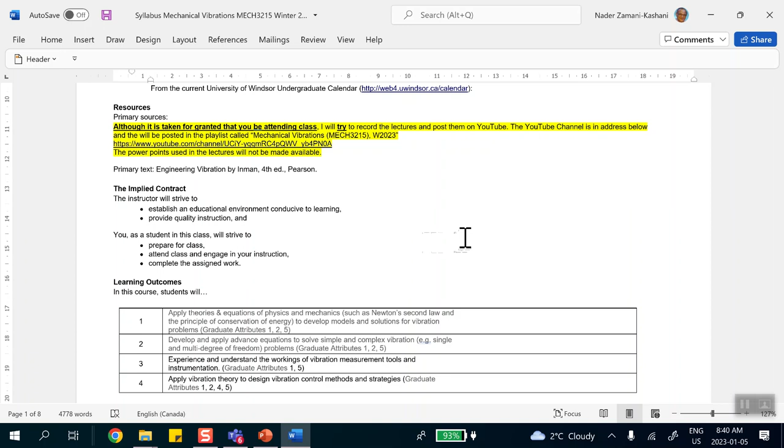Okay? Or if you say, that's okay, I'll borrow some other friends' screen capture documents. That happened last summer. I saw people had screen captured or taken notes and copied it, multiple copies, given it to friends. Okay, I saw that, and I have no issue with it. It's just that if you read somebody else's stuff, particularly the day of the test, it's not going to help you. But anyway, this was not in the course syllabus. The reason I wanted to put it there is that I don't want people to say, this is mean. Why can we bring everything, but you're not giving us the PowerPoint? I told you: make your own PowerPoint if you want. Bring it. Okay, everything else is the same as what's already there.

Just about every 3 weeks during the lab, 50 minutes, and if there's no class after that, I'll give you an extra 10 minutes, okay? And even if there's a class after that, I'll try to convince the instructor to give me 10 minutes, we're running a test, okay? 1 hour on the material, done. Okay, now remember, in certain courses, material depends on the material done earlier. Some courses may not be like that.

If you take a course, I don't know, technical communication, or maybe you haven't taken engineering in society yet, but you will, all of you who are in 4th year. You go to 3 weeks of classes, they say something, that's it. Learn it, come back and write a test on it, okay? But engineering and math doesn't work like that. You might pretend that it works like that. We might think that we are so good that we can treat it like that, but it's not. Anyway, we'll come back to that.

So these are the dates during the lab hour, and this is the list of the GAs that we have now. This person, you don't have it. I got the information last night and I fixed it.

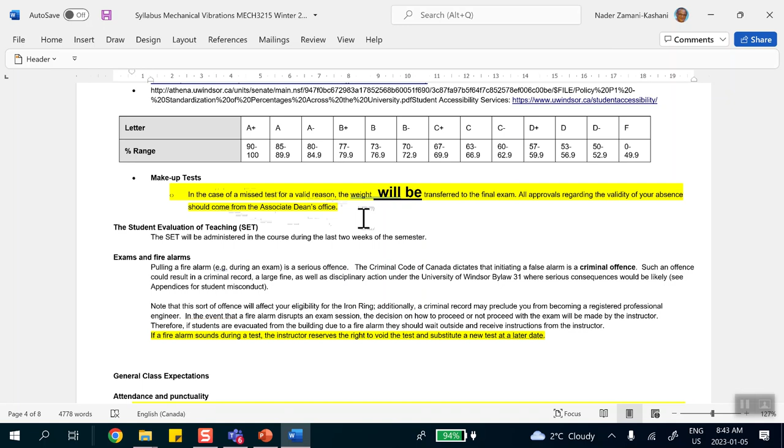If you miss a test for a valid reason, and I'm not going to judge you, don't come to me, please, saying that I was sick or I was traveling. These are perfectly legitimate things. But go to the Associate Dean's office, discuss your case with the Associate Dean. If she agrees with your explanation, she will tell me that this is a legitimate reason, so I'm going to take the weight of that test and put it on the final exam. Okay? I think that's what it says. Yeah, I'm pretty sure, down there. So, final exam. Good. We don't want to hear about fire alarm, but this usually applies. Yeah.

Okay. Already talked about this. This course does have supplemental privileges. The reason I say that, some courses do not have supplemental privileges. For example, if you did fail the technical communications course, you have to take it. There's no way to go and say, I want to write a makeup test on that subject. But this one does. Most courses do, but the ones that involve design and communications and essays and things like that, they don't have it. You have to take the course again. But this one does.

Generally speaking, supplementals are done in December of that year. Now, most of you are fourth-year students, okay? So you will be graduating. You can't come December of next year because in principle you're going to be done in August. And I understand that. If there are situations like this, we will give you an early special supplemental exam. The associate dean will tell me that this is the situation. No problem. Otherwise, it's whenever every other supplemental is, which is in December of that year.

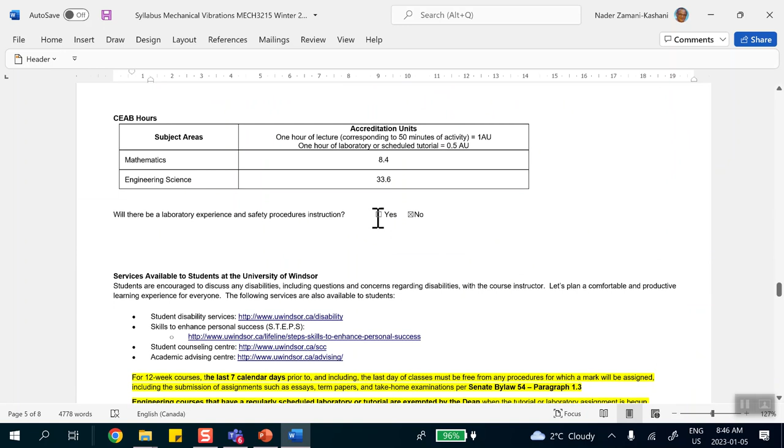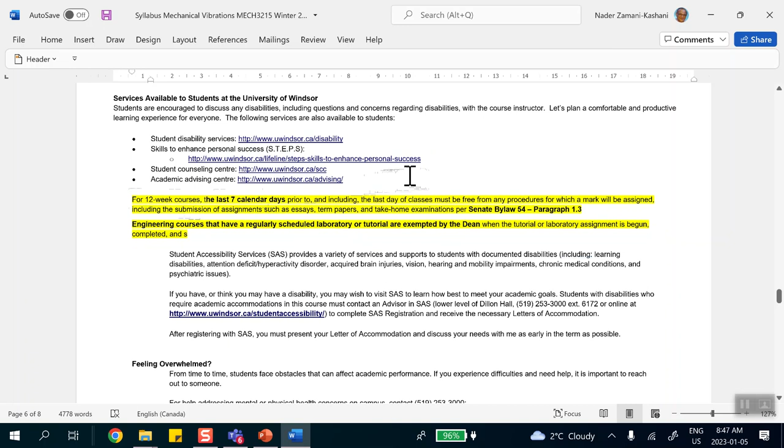Important, but usually people don't care about it. If you have any questions, let me know. I will not have anything that gives you a mark in the last 7 days of classes, so you don't have to worry about that. Certain courses this doesn't apply to. And yeah, that's pretty much it. So it's very similar to what you already have, but with some minor changes. Don't save. Okay. Are there any questions? Questions? We're good. All right. So let me see for a second.

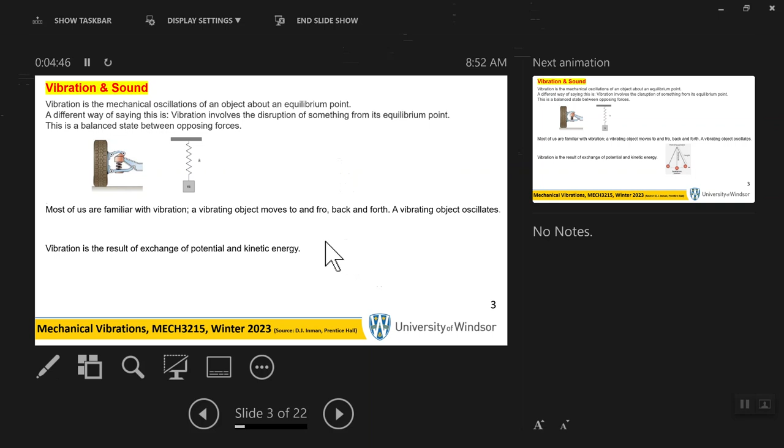Now, an ordinary person will say vibration means moving back and forth, to and fro. Something that moves about an equilibrium point. Vibration is an oscillation. The reason that vibration takes place is that kinetic energy and potential energy are exchanged. Imagine a pendulum hanging from the top. You move the pendulum slightly to the right and let it go.

So what happens when it reaches the top point? That's where the kinetic energy is zero. It is not going anywhere. Velocity is zero. Kinetic energy is zero, but it has the biggest potential energy because you raise the mass above some reference point. Now imagine it comes back to the vertical position. There, the velocity is maximum, but there's no potential energy.

If you measure your potential energy from that bottom point, the bottom equilibrium point, there's no potential energy. So as this thing takes place, kinetic energy and potential energy are exchanged. Okay? That's what a vibration is: exchange between potential and kinetic energy. Now, we are assuming that there is no loss in energy, because you know what happens here.

If in a pendulum, for example, you let this thing vibrate, oscillate for a long time, eventually it stops. Why does it stop? Because at some point, the energy is completely lost. Okay? So we will do that, but in the ideal situation, this vibration takes forever without any loss in energy. Where do you think this loss of energy is coming from? Why does this thing slow down after a long time? What does your common sense tell you? Why does it stop? Yes.

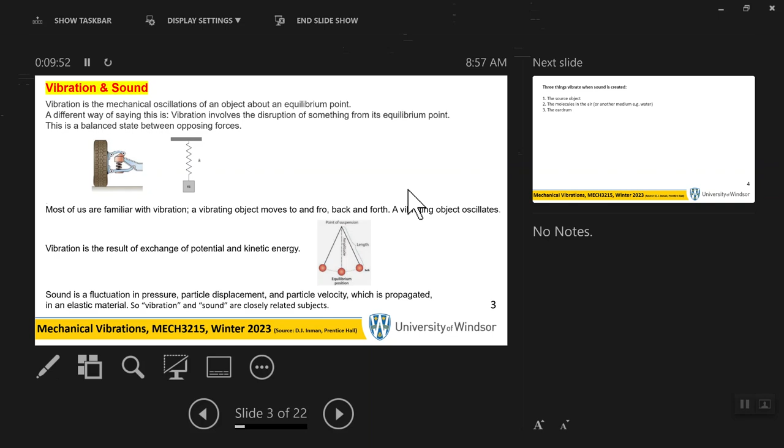So sound is vibration, but vibration of the molecules of the air, not traveling. They just hit the next guy, that guy hits the next guy, and each goes back to its original position. In that sense, sound has the same source. Sound happens because of three things: vibration at the source object, the speaker diaphragm; the molecules of the air; and at the end, the eardrum.

And by the way, this concept is not only sound; it also applies to, for example, electromagnetic waves and things like that. There is no air there that moves, but the same concept applies. Okay. So air itself does not travel.

Now we are concerned about sound because it bothers us. A buzzing sound, a high frequency or low pitch sound, bothers us. The vibration frequency of sound that we can hear as human beings is in this range: 20 hertz to 20 kilohertz. Dogs or other animals can probably hear outside that range, but human beings are sensitive to audible sound in that frequency range.

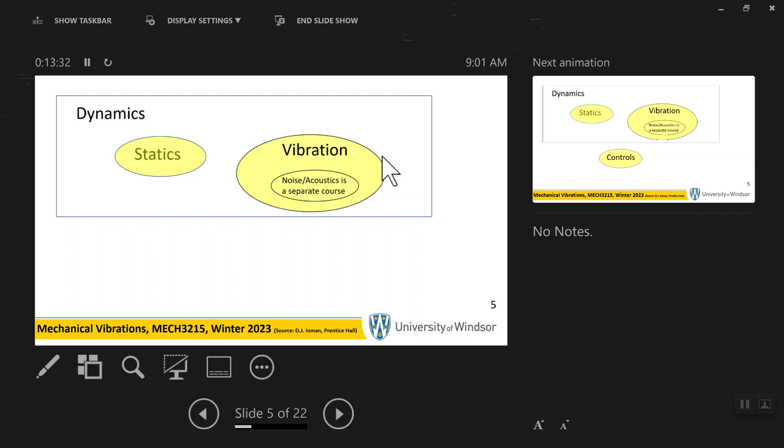Now, vibration is part of dynamics. Loosely speaking, things must move, oscillate, vibrate, whatever. So vibration is part of dynamics, and acoustics or noise is a subset of vibration. This course is about vibration. But if you learned everything about vibration and you don't know what to do about it, that's useless. So you need to control the vibration. That is not part of this course. But in order to do anything meaningful, you have to control.

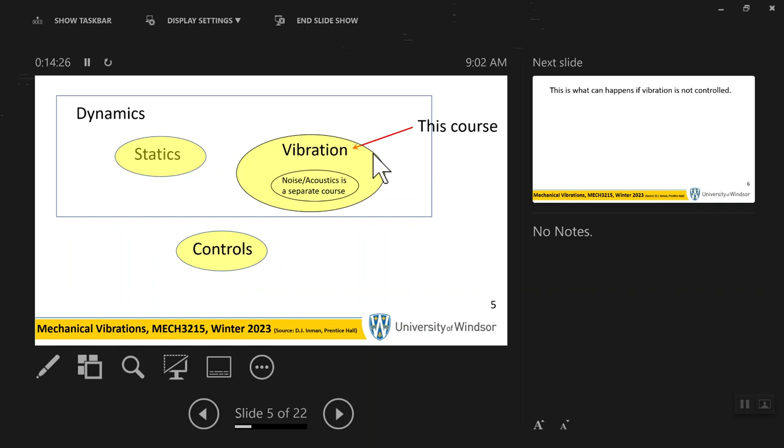That is, you have all taken the control theory course, right? Third year. Oh, is it fourth year? It used to be third year because there were two controls courses. Now there's one. Apparently everybody takes it. You will see that they talk about the same kind of equations that we're going to see here, and they do things with it. But that's not my problem.

Now, what can happen if vibration is not controlled? I'll show you a video. Do you recognize this? Ambassador Bridge? Really? Where is this? Okay, so we'll find out.

I have to admit that when I did my undergraduate education, I did it in pure mathematics. And I stayed away from anything that had to do with reality. Not even an economics course. The very first time I ever saw something like this was after I went to graduate school in an applied math department. I was the GA for a differential equations course. No vibration in sight, no force equals mass times acceleration in sight.

But anyway, differential equations. The guy who taught the course showed this on the screen because it's closely related to the subject. You see something like that getting bigger and bigger, and eventually you see what happens to it. What do you call this? You go to an interview, less than a year from now. The guy asks you, "What do you know about this? Why did it happen?" Imagine a twist like that. What would your answer be?

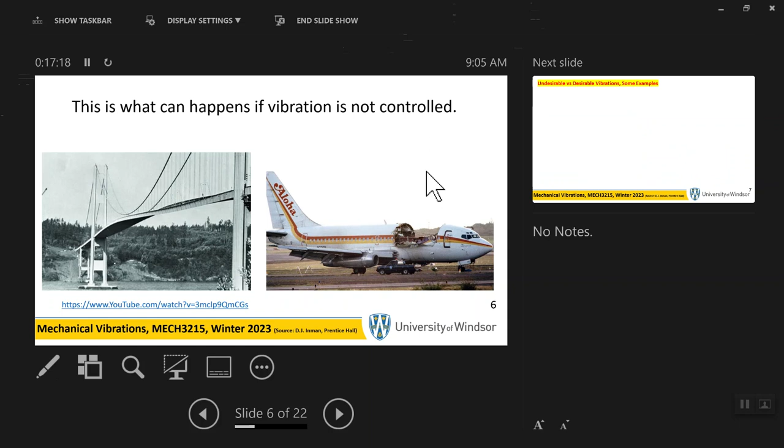So, I want to show you this. Let me stop that. We'll go here. Hopefully this will work. Come on. Oh, let me copy this. At home, when I clicked on it, it would take you there. We'll see. Paste. I don't know whether the sound comes, but we'll find out. Come on.

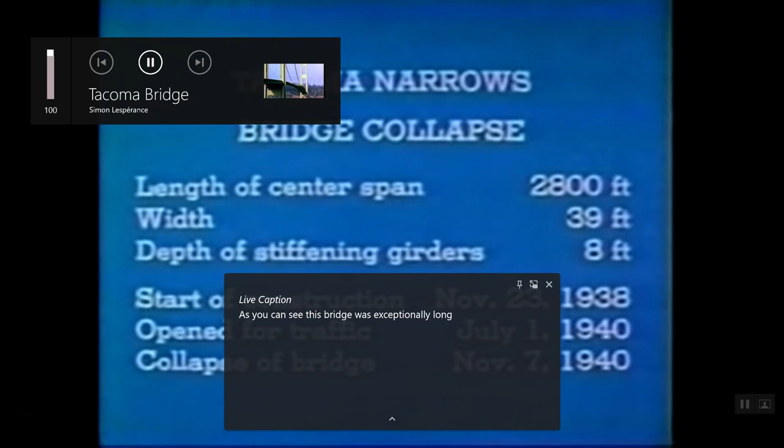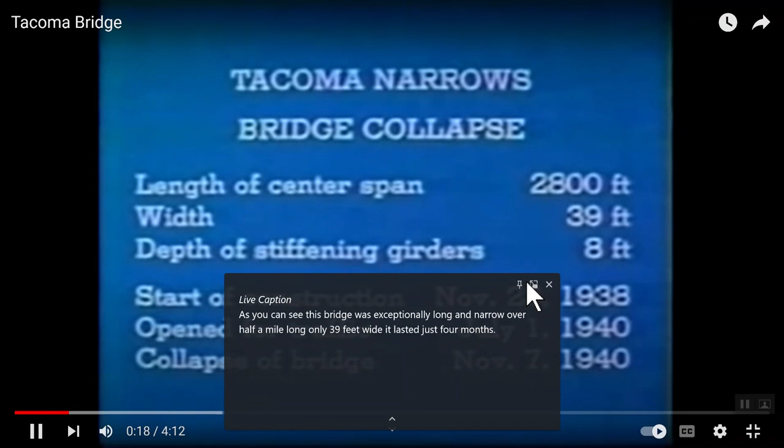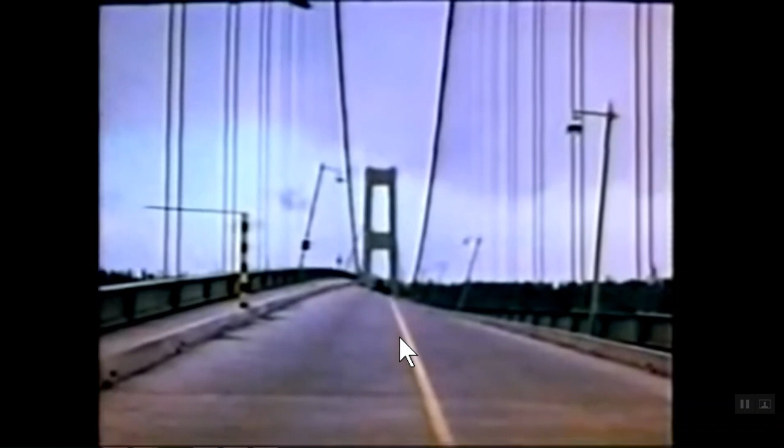As you can see, this bridge was exceptionally long and narrow, over half a mile long, only 39 feet wide. It lasted just 4 months. During construction, we see the steel girders, 8 feet tall, which were supposed to stiffen the bridge against bending. However, some up and down vibration was observed during the entire useful life of the bridge. Here's opening day. On November 7th, the bridge suddenly went into a twisting motion. The wind speed was a steady 42 miles per hour. This was enough to keep the bridge oscillating in one of its natural modes of vibration with a period of 5 seconds.

A professor of engineering went out to see what had happened. He's coming back, walking with some difficulty along the nodal line, which is the center stripe of the roadway. It's remarkable that the girders were this flexible. This is photographed at normal speed. However, a collapse was inevitable after a little more than an hour of this.

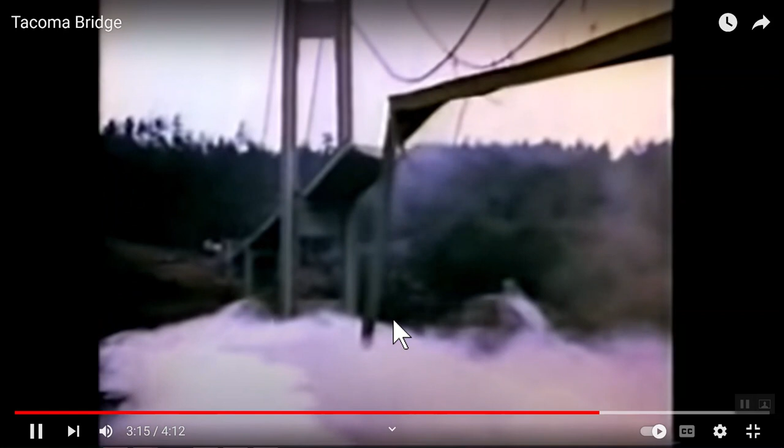Now, by the way, after that thing, there was a press interview with the governor. This was Tacoma Narrows Bridge, the name of it, Tacoma Narrows Bridge in Washington State. And the governor very assuredly told the reporters and the members of the press, don't worry about it. We're going to make this bridge exactly at the exact same location, exactly the way we made the first one,

and it's going to be ready soon. And somebody said, well, it's going to fail exactly the same way that the first one did, which is true. There are design flaws. You do it again, it may not happen next year, it may not take 4 months, but it may take 10 years. Eventually, those design flaws are going to pop up in some other way. Okay, so let's move on.

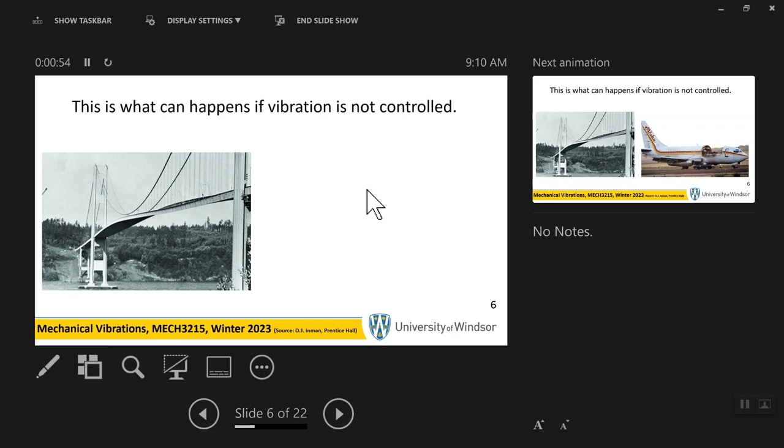This one. So now, vibration is not always bad. I mean, you use these shakers to separate, for example, small blueberries from big blueberries, or small nuts from the big nuts. Or another one is a rock crushing mechanism. We did a version of it in the class last. It was a 4-bar linkage again. It went back and forth and crushed the stones. So vibration is not always bad, but it can also be catastrophic.

And the one that you saw with the airplane, not the one with the bridge, was eventually traced down to fatigue crack growth. As the plane takes off and lands, the pressure inside the cabin must be controlled. So they raise the pressure, they lower the pressure to make it atmospheric, raise, lower. So there is something that is changing over time.

And if it is a tiny little crack, you have done materials course, under this very small change in load, pressure raising, pressure lowering, this cyclic load, that tiny little crack becomes bigger and bigger. It jumps from one rivet to another rivet, and then to the next one, and the whole thing can fall apart. Basically, there's one gigantic crack going around the top between rivets.

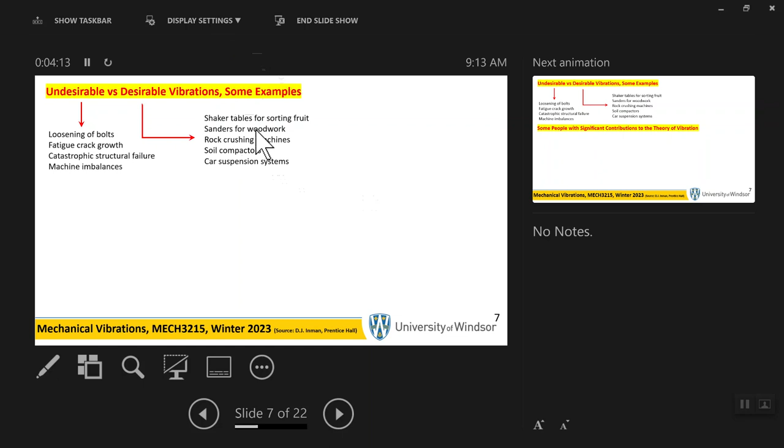that is noticeable. You should be able to say how much force is transmitted to the ground. You don't want the whole force to be transmitted, because it's going to come to you through the ground. You're going to feel it. So you want only a portion of it to be transferred. Machine imbalance is very critical, and one of the things we do in this course. Now, I want to show you some pictures.

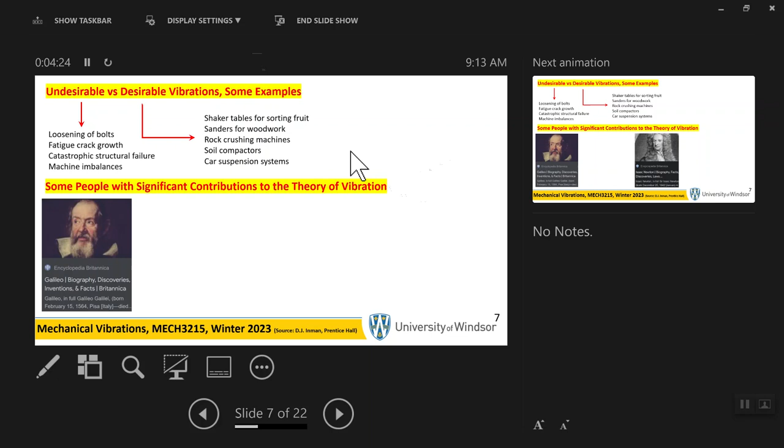Galileo was the very first person who actually worried about these things. I'll give you some names. It's good to know who did these things. Newton, obviously, because vibration is dynamics. Dynamics is F equal to ma. Hooke. Where does Hooke come into the picture? You know who Hooke was, right? Can you tell me how Hooke comes into this business? Yes?

Yes, of the spring. When you try to do vibrations analytically, and experimentally too, you need a mass and you need a spring. We leave the damper aside. Damper is what takes energy away, like friction. Let's say we're living in an ideal world. Spring and a mass. Hooke did not per se do vibration, but his contribution is in defining stiffness.

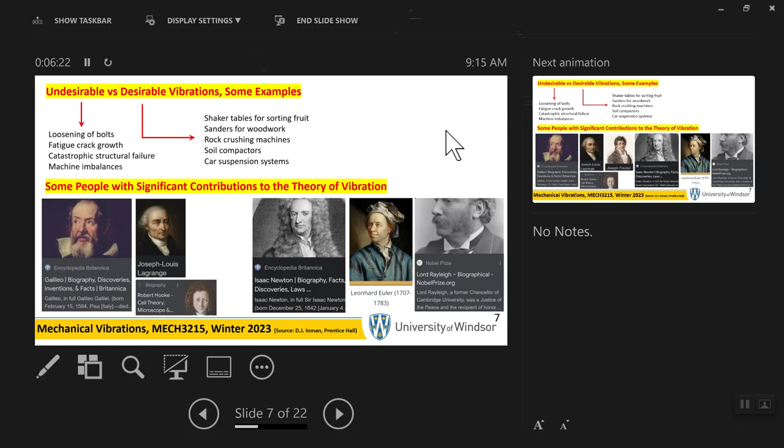So one of the things that you can't escape here is the concept of frequency. For example, you take a spring and attach a mass to it, either this way or that way, or put it horizontally, it doesn't matter. You take the mass, move it to another position, and let it go. You know what's going to happen. Or this, whether it's on the top or the bottom.

So frequency is the number of these oscillations in 1 second. The unit is cycles per second, number of oscillations per second, and they denote it by hertz. This is fine, but most of the stuff that we're going to be doing when it comes to frequency, when it comes to doing some hand calculation, is not in this unit. It's in a different unit, which is not cycles per second, but radians per second, because each cycle is 360 degrees, right?

But degrees is a layman's, ordinary person's unit of angle. The unit of angle is radians. So one cycle is 2 pi. 2 pi radians per second is the frequency in that unit. So let me say it again. In 1 second, how many cycles? Each cycle is 2 pi. So if you take hertz and multiply it by 2 pi, you get the circular frequency, which is radians per second. Any radian per second divided by 2 pi, you get hertz. So these are related.

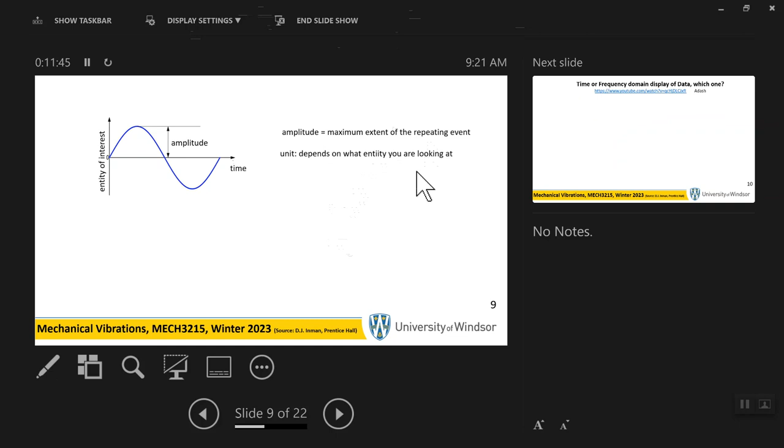So, move on. When you take one of these cycles, it looks like a sine, but it doesn't have to be sine, I'm just drawing it as a sine. There is an amplitude, and when it comes to amplitude, plus or minus doesn't matter for us. So there's the amplitude, the maximum extent of repeating events. And let me show you something.

So you have this machine, this fan that is going up and down on this table, and you want to find, for example, the displacement of the table. The fan goes up and down. The reason is that the fan is not a disc. If it was a perfectly round manufactured disc, as it turns, there wouldn't be any oscillation.

None whatsoever. But it's not a disc, number one. And even if it was a disc, it would not be perfect. There's a tiny little chip there, or a little hole there, or just by manufacturing reasons, some part of it was a little bit heavier than the other one. Or the place where you actually stuck that disc into the center of rotation may not be exactly the center of mass of the thing.

So anyway, I'm saying that even if it was a disc, the table will go up and down. Definitely for a fan, it will go up and down because there's an imbalance. Okay? Now, you want to know, for example, what the displacement of the tabletop is. Okay, so these days they go and get an accelerometer, stick it to the table, and they measure the acceleration, not the displacement. You can measure displacement, but an accelerometer measures acceleration.

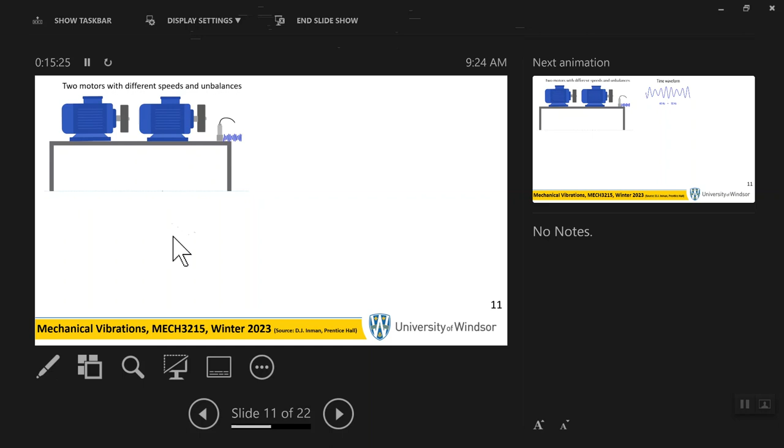So suppose we have two motors sitting there, my fans, and they're turning. And I put that accelerometer on the corner of this table and measure the acceleration. And if you look at the time variation of what you're recording, don't let it fool you. This is not real. Real stuff is going to be jagged. Totally useless if you just try to do that. That is made in that particular case.

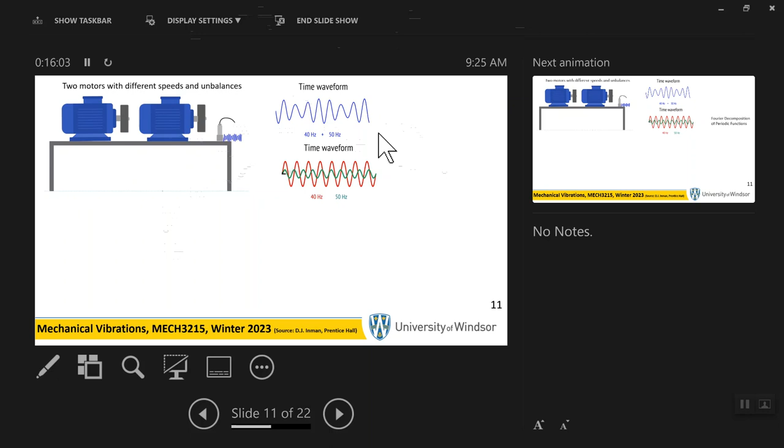If you can use your device to show that the frequency content is actually made of two frequencies, and I've drawn it. If you add these two functions, 40 hertz and 50 hertz, you get the thing on the top. Okay? So, same diagram. It's the same graph, except notice the way I'm displaying it is a little bit different. The amplitude is up. The horizontal axis is time. It's exactly the same graph, blue graph, or decomposed one below it. It's exactly the same thing. I haven't done anything.

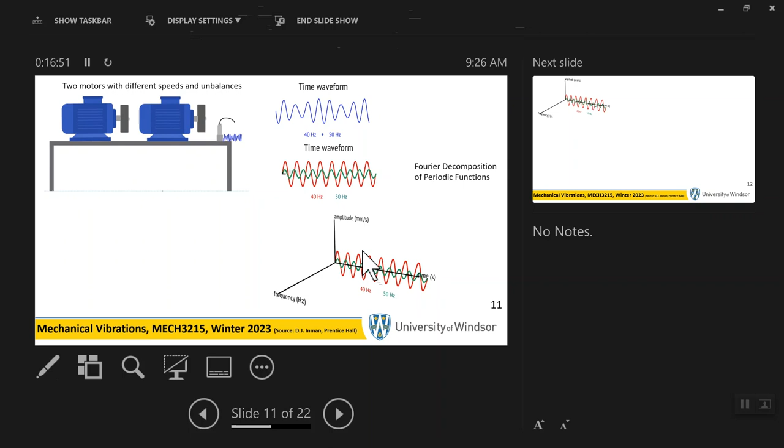But there's an additional frequency axis that I've introduced here. This graph is exactly that graph. I haven't done anything to it yet. Now I'm going to say, okay, when I look at the red one, I know that it's 40 hertz. Just literally go count 40. And the other one is 50 hertz. So I shifted it to 40 and 50. You see that? Now, instead of being in the plane in the back, it's at 40 and 50 hertz.

Just look at the red one. The red one is on the frequency axis at 40 hertz. The green one is at 50 hertz. All I've done is separate these two graphs from each other. Before, when you were looking at it, they were both sitting on the same axis. Now I have separated one on the 50 hertz axis, the other one on the 40 hertz axis. Okay, so exactly the same thing, except I've turned things around. I'm looking at it differently.

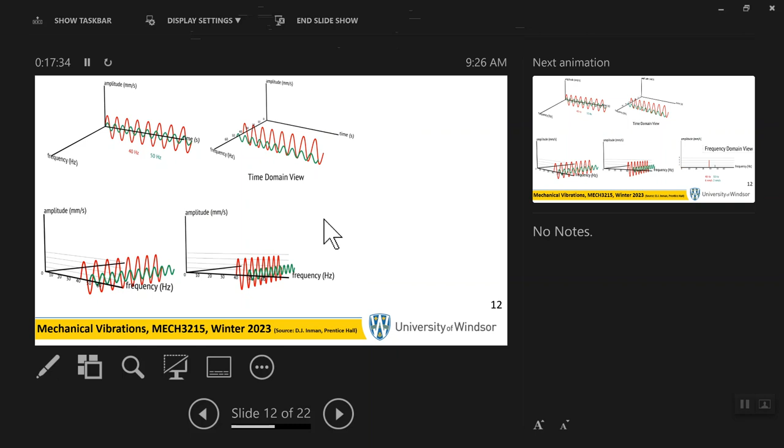Exactly the same thing. And let me turn it a little bit more. And a little bit more. This is what you're going to see. If you looked at the top graph down the time axis, you will see two curves. On the side, what do you see? Just a spike. Because the curve is coming towards you. You can't see it. This red curve is coming towards you.

When I look at it from here, all I see is the amplitude at 40 hertz. And the green one, that green one is coming towards you. And if I look at it from here, all you see is a green spike at 50 hertz. That says it all. Anything that you want to know about your machine can be deduced from this information. You don't have to see sines like that, because all that's important is how often this thing repeats and what the amplitude is. That's what I mean by looking at frequency information.

When you buy an accelerometer and you attach it to something that records the data and shows it to you, you have a choice, seeing it in the time variation or frequency. If you look at the frequency with the frequency option on the display, you just see this. If you look at the time, you see that original blue curve that is not even here. I just basically showed it to you as a green one and a red one, summed up.

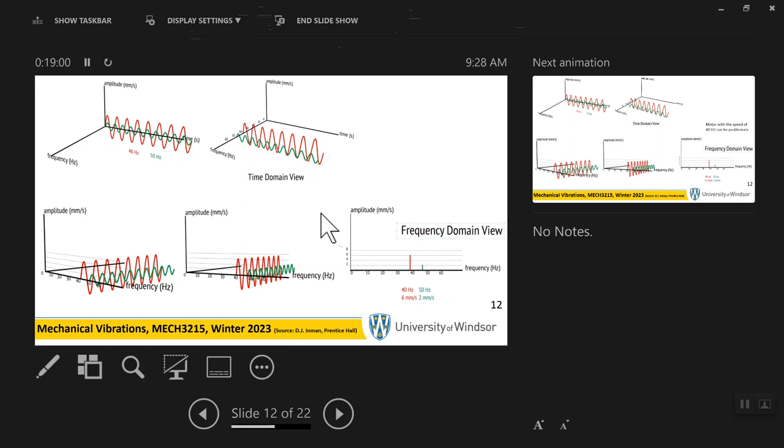Now, we still have it on time, so that's good. So, what do we do here?

I'm sure you've seen it sitting at the window of the airplane and see this wing going like that. See, that's scary. First of all, it doesn't mean it's going to fall apart, because they took these things into consideration when they designed it. If they don't, you end up with a Tacoma Narrows Bridge or that other situation. Wait a minute. Okay, so vibration. You're looking outside the window, you're seeing the wing vibrating.

That scares you. Maybe the rudder, what's that thing? Is it rudder at the end? I can't remember the one that goes like this. Any aerospace students? In a boat it is a rudder, but maybe that thing that makes the yaw motion. Anyway, the thing is that you're not even seeing that. That doesn't bother you. All you're seeing is the wing. Okay, so we concentrate on the wing. The thing in the back may be even more dangerous, but you're looking at this.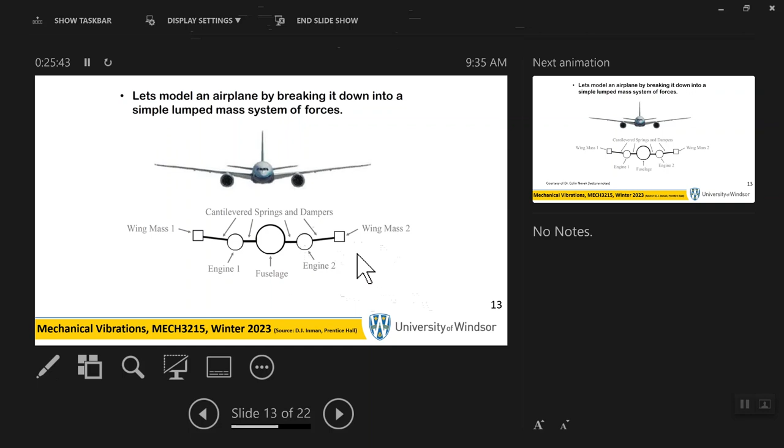All right. Here, essentially, I have thrown these pieces away. I've done a mass here and a beam. It is possible to do other things. Now, I already talked about these things, and the full model is going to be just about impossible to do manually. You can do it on computer, and they do it on a regular basis on computer, with CATIA, which is a terrible FEA solver. Boeing and Airbus, the first attack on the design is using these basic packages.

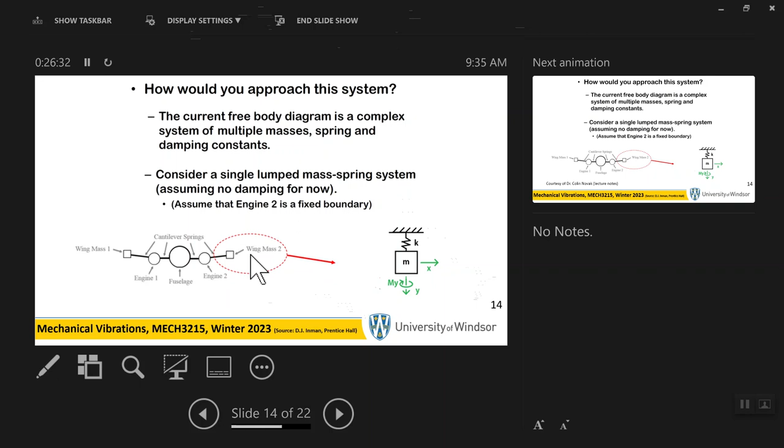Okay, so basically this particular thing that I'm showing you, it looks like I just did the end piece, another cantilever beam. This piece is the beam. That was a beam. The one that I described to you with the two-engine aircraft was this piece. But you could have done it for that because that's also a cantilever. Right there. Cantilever, beam, mass. So basically, we modeled it as a spring and a mass.

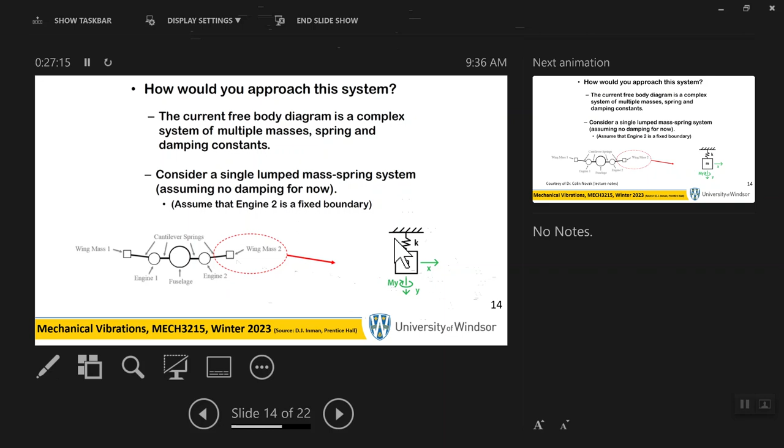This mass can have motion up and down. That's what scares me. It can rotate, spin like that. That's going to give you the yaw motion of the entire wing, and the wing can actually go that way. That doesn't bother me. I can't even see it. It oscillates like this too. But anyway, these are things that we do.

Some of these are taken from Dr. Novak's course that he has offered over the last few years. You take a car. Well, the car has 4 wheels, right? And if you took, for example, the front two and lumped them together, squished them together, there's a tire here, a shock absorber, etc. If you squish it together in the front or in the back, you get what is called a single degree of freedom model of the car. So all you're caring about is vibration like that. You're sitting in the car, the car goes on a bump, and it goes like this. That's all you're caring about.

If you lump the front ones together, you see one of these. The rear ones lumped together, you see another one of those, and put together, you see this. This is a half car model. That's called a quarter car model. In the half car model, you can also do bounce and pitch. As you go over a bump, the frame of the car can not only go up and down, but it also can pitch. You cannot do it with that, because that's a point mass, essentially.

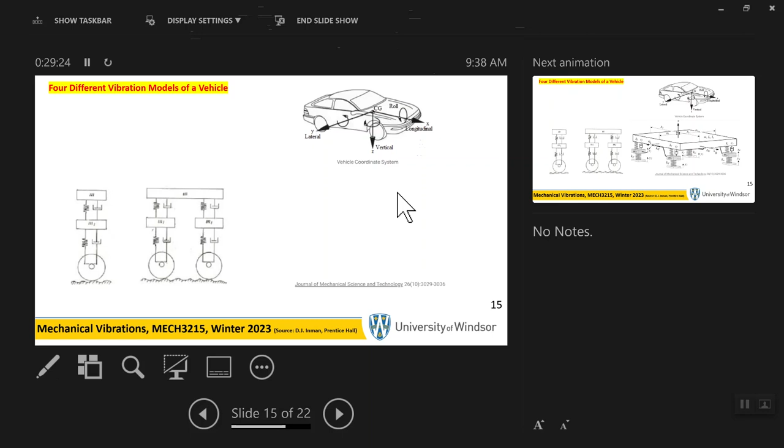So you get the information. The more assumptions you make, the less reliable your information is. But the first round of design is all these very crude models. You don't even know what you want to do. So you don't go and make the whole thing in software and then decide that this shouldn't be like that, let's go change it. Anyways, more realistic is the full car model. You can do bounce and pitch, up and down, and the roll motion, which may not be doable with other things.

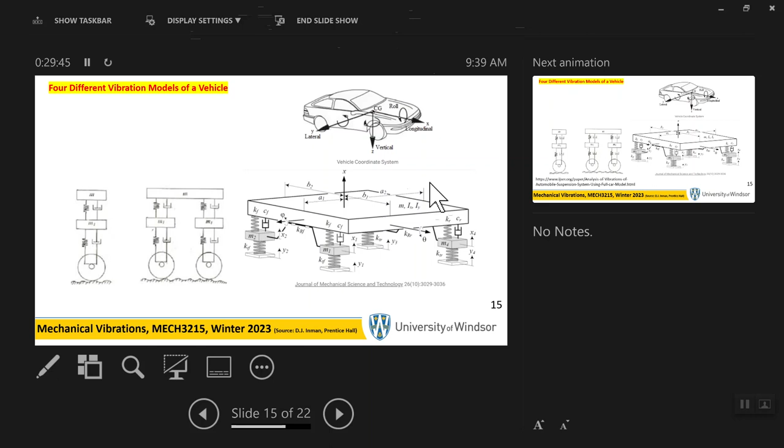So I think I showed you these. One of the things that's going to be extremely important in this course is the number of degrees of freedom associated with a model. For example, the very first one that I showed you, we still have about 5 minutes and I can finish that. The first one that I showed you was a 1 degree of freedom motion of the car, up and down. The next one that I showed you was a 2 degree of freedom motion.

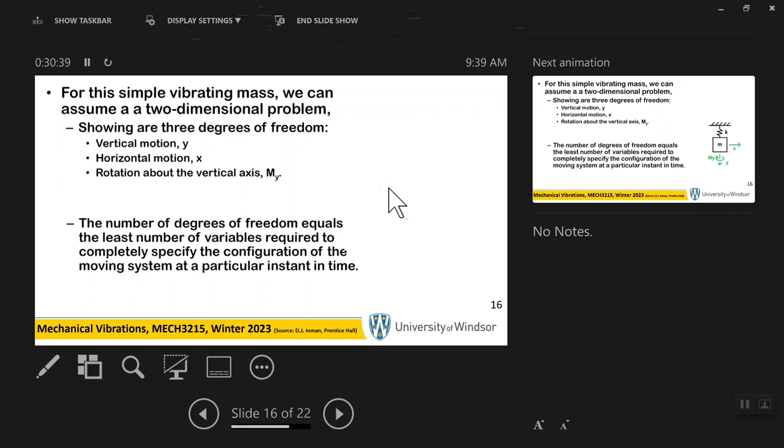For example, you can think about motion of the front wheel, motion of the rear wheel, or you can look at the frame of the car, up and down motion, and the pitch motion. It's the same thing, 2 degree of freedom. The other one was a 4 degree of freedom system. Okay.

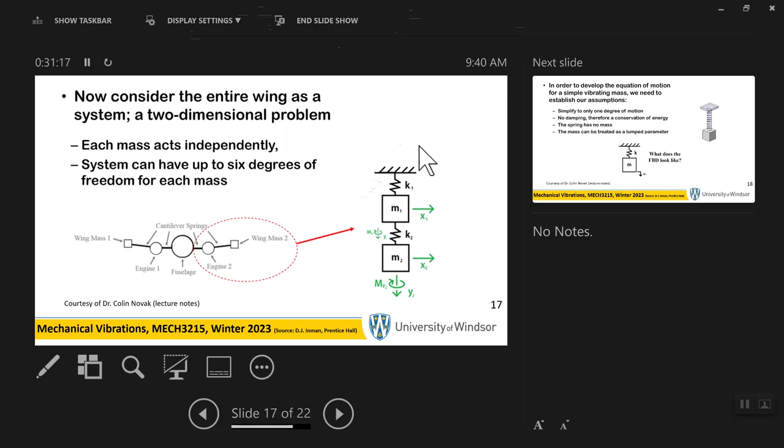In reality, if you have a situation like that for the wing of the aircraft, if there are 2 engines, 2 on this side, 2 on that side, there's no way you can do it with 1 degree of freedom. That wing on one side, engine 1, engine 2. This is a 2 degree of freedom system. We're going to do that in the last 4 weeks of the course. Okay? 2 masses, 2 springs. The number of masses and number of springs has nothing to do with it. What is important is how many degrees of freedom does this have?

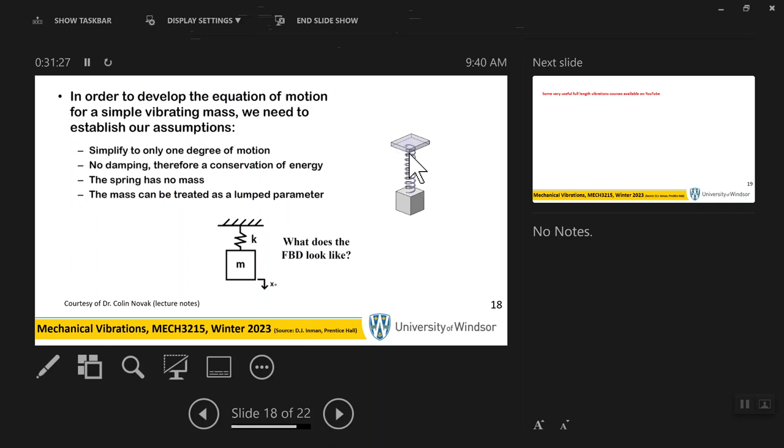Okay, let me see for the next one. Just 1 second. I think that next one is not a big deal. We already talked about all the different aspects of it. It's not an issue.

Now, if you go on YouTube, there are lots and lots of courses and people talking about something like this. There's going to be another one when I post mine. If you don't understand what the hell I said, because I'm explaining it in a poor way, fine. Well, obviously you have to go to a book. You don't have a mandatory book, but this is what I'm using for the source of most of the stuff in this course, Inman's book. You can go to a book if you want, or you can go to some good set of lectures.

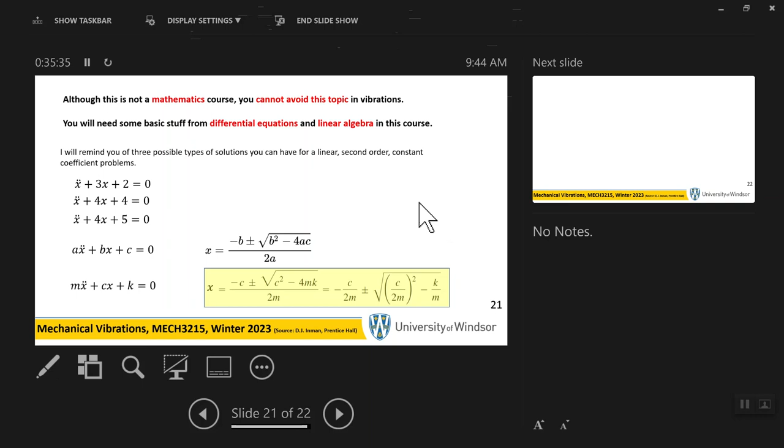As a review, I'm going to make a video on this last transparency and post it along with the lecture notes, of course. I think this is it. Yeah, pretty much. I was on time actually. That was good. We're done.